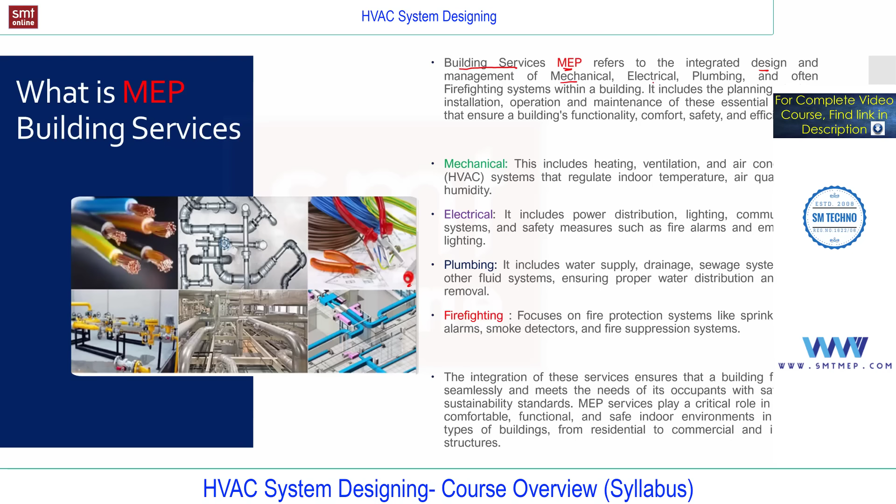So I'm going to share the screen. You can read MEP here. In short, we used to call it mechanical, electrical, and plumbing, or building services. This building services, in short MEP, refers to the integrated design and management of mechanical, electrical, plumbing, and also the firefighting system. It includes the planning, design, installation, operation, and maintenance of this essential system to ensure the building's functionality, comfort, safety, and efficiency. For example, a building without these services is of no use - a building without electricity, or just visualize a building without the plumbing system. So these services are very important for the building. In short, we used to call it MEP.

Actually it's building services, and under this you'll find four services. One is mechanical. Under mechanical, you'll find HVAC. In short, we used to call it HVAC - heating, ventilating, and air conditioning. So under mechanical, you'll find HVAC, and E is for electrical service.

Under electrical, you'll find lighting, power, and alarm, emergency lights, etc. Then P stands for plumbing. So in plumbing, you'll find water system, drainage system, fixtures, a lot of things.

So altogether, we used to call this MEP - total four services combined together. In short, in actual practice, we call it MEP or building services. So now listen, this is important. If you are learning HVAC, that means you are learning a part of MEP.

And as a mechanical engineer, it is recommended to start with HVAC, and as electrical, it is recommended to start with electrical. Later, electrical people also get involved in mechanical services, and even mechanical engineers get involved in electrical services, for what? For coordination. The reason is all these services are for the building. So the electrical engineer must coordinate with the mechanical engineers, and the mechanical service engineers must coordinate with the electrical, and all this is linked with the architect.

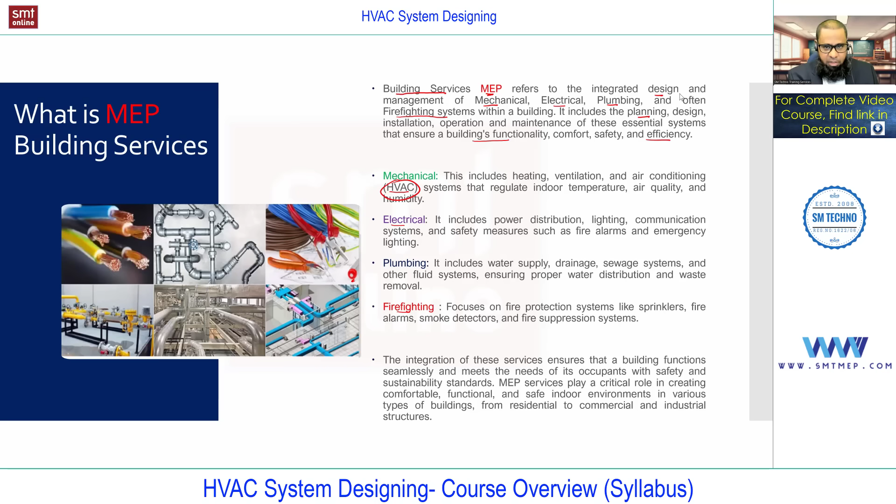So we are talking about this HVAC training. In the next slide, you'll find information related to HVAC. HVAC, in short, we call it HVAC - heating, ventilating, and air conditioning. And if you talk about HVAC, you'll find different societies like ASHRAE, ISHRAE, and you'll find carrier, you'll find SMACNA, and a number of options.

When we start the course, we'll talk about these standards also. HVAC stands for heating, ventilating, and air conditioning, and this is used to control the indoor environment conditions. At this level, I'm just giving general information. In detail, we'll discuss in chapter 1.

We'll start with the definition of air conditioning, so at this level I'm just giving a quick idea. HVAC stands for heating, ventilating, and air conditioning. It refers to the technology and systems used to control the indoor air environment or condition, including temperature. So we are maintaining some parameters that include temperature, humidity, and air quality. Under air quality, you'll find velocity, distribution of air, noise level, etc.

You'll find a number of parameters that we'll discuss in chapter 1. This is just an introduction, for various buildings and structures. This HVAC is not only for residential - this HVAC system is for residential, commercial, and no doubt industrial. And not only for human comfort, this is also for process control. So you'll find n number of applications for this air conditioning.

Okay, so this is just a quick idea. So as I said at the beginning, in this session, you're going to learn what you're going to learn in this training program. So I'll give you a brief idea about the syllabus.

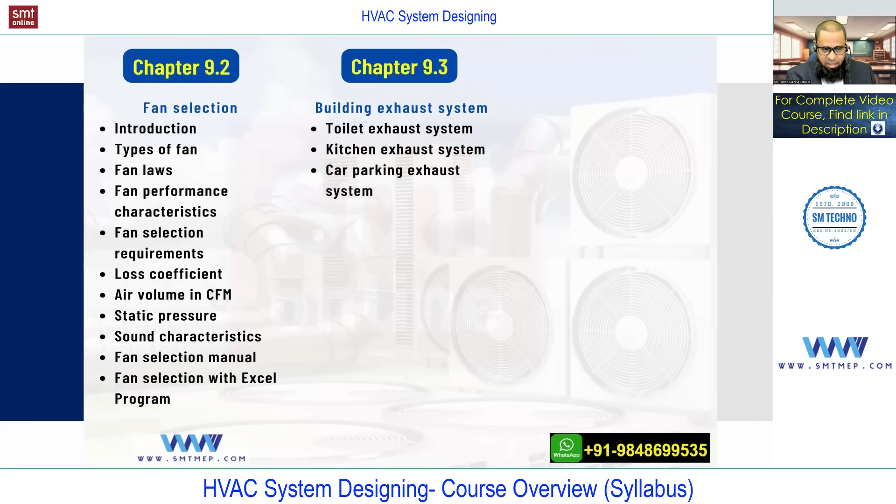Then we'll also discuss the exhaust system. This I'm also considering as air side because the exhaust — toilet exhaust, kitchen exhaust, or car parking exhaust system — all I'm considering in air side because it's an air side system. So all you'll get in part 4.

Now, part 5 of module 1, I'm considering water side, water system. Water system means I'm talking about the chill water side. It can be for air cooled chiller or it can be for water cooled chiller. So different types of pipe, different material, then the arrangement like direct return system or reverse return system.

Then no doubt this pipe designing. Again in pipe designing, first we'll deal with the manual chart from ASHRAE or from Carrier. The end result is going to be same.

Then the same example, I'll proceed with the pipe sizer. Most commonly in actual practice, you'll find McQuay pipe sizer. Then we have different methods for pipe sizing like velocity method or ASHRAE method, velocity plus friction, etc.

So in chapter 11 of part 5, you will find fittings and accessories. Different fitting, different accessories, which is very important for interview point of view. We used to call it, say, valve package, or we can also call it hookups.

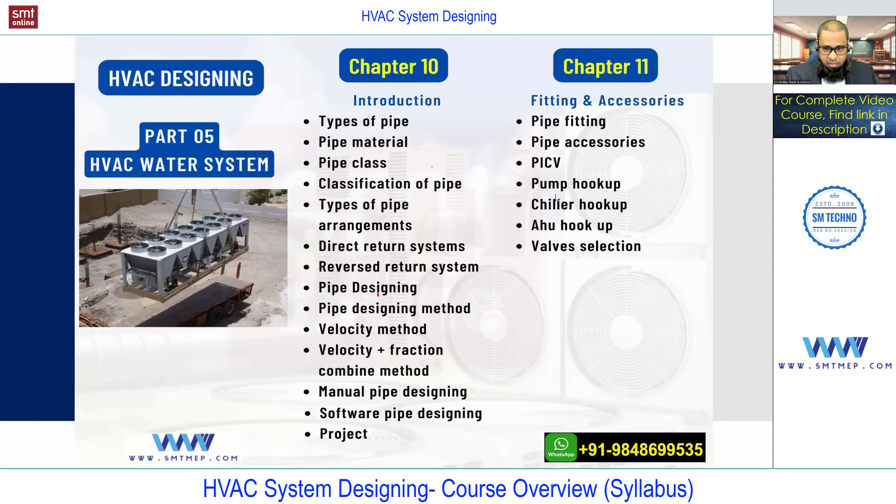Again, this chapter 12 is important for pump selection. So this pump selection also I'm considering in part 5. Different types of pump, different pump laws, then how to design or select this pump, how to find out the head calculation with an example, with a sample project.

Again in pump selection, first we'll deal with the manual calculation, then the same using Excel program, because in actual practice to save time we are using Excel program. So once you know the concept manually, using Excel is going to be simple.

For primary pump, for secondary pump, or the different systems like primary only system or primary plus secondary, or you may find primary plus secondary plus tertiary. So you'll find the different systems related to pump — all about this pump selection you'll find in part 5 under chapter 12.

And chapter 12.1, which is also a part of part 5, you'll find the cooling tower selection, makeup water tank, expansion tank, air separator, etc.

So this cooling tower is for water cooled chiller. Makeup tank, again for water cooled chiller, even for air cooled side also but limited capacity. Then expansion tank sizing, again for both chillers, air separator, etc. So this I'm considering as an advanced topic, which you'll also find in part 5 of module 1.

So these are the total 5 parts of module 1, which comes under designing. So module 1 I'm considering as HVAC designing.

Okay, so the major part of this training is this designing side. Designing is divided into 5 parts. Part 1 is basic, part 2 is manual load calculation, part 3 is software load calculation, part 4 is HVAC air side, and part 5 is HVAC water side. So I think you're getting my point.

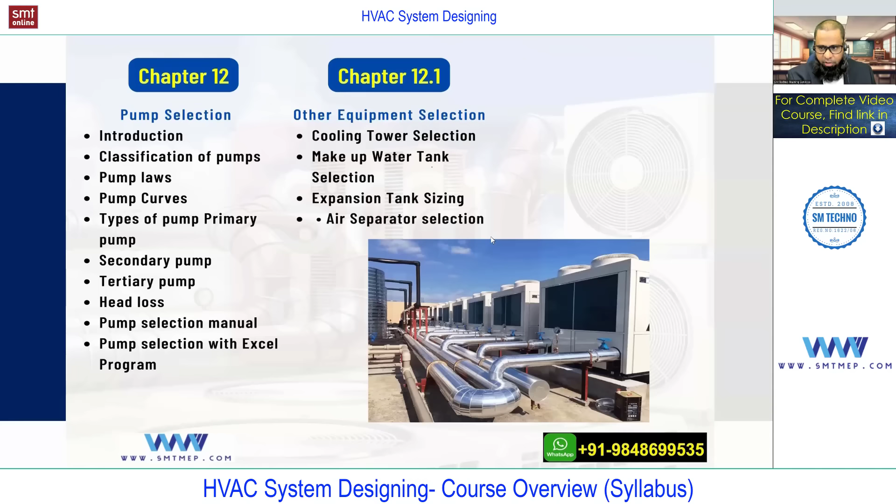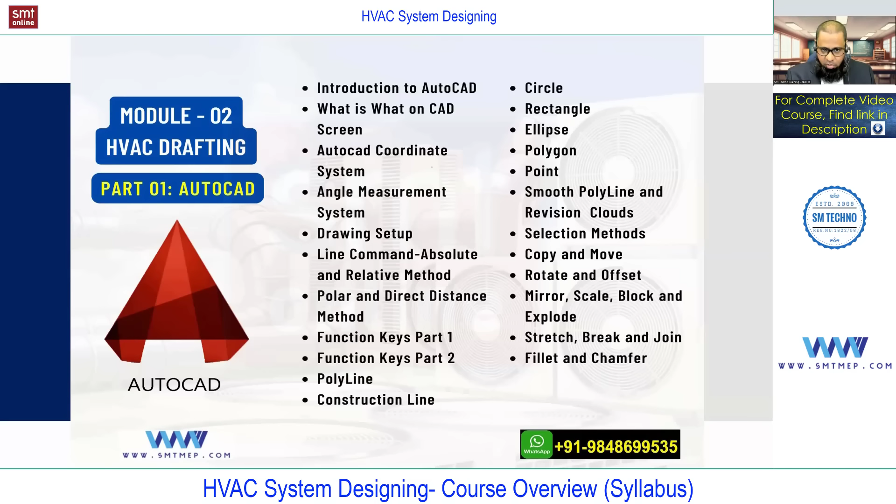So this is about module 1, HVAC designing. Next, if you talk about module 2, I'm considering part 1 and 2 in module 2. Part 1 is AutoCAD, how to draw, and part 2 is HVAC drafting, what to draw. So you can read all these topics. I'll share this presentation after the session. You can spend some time and read all the topics so that you'll get the idea what topics you're going to get in this.

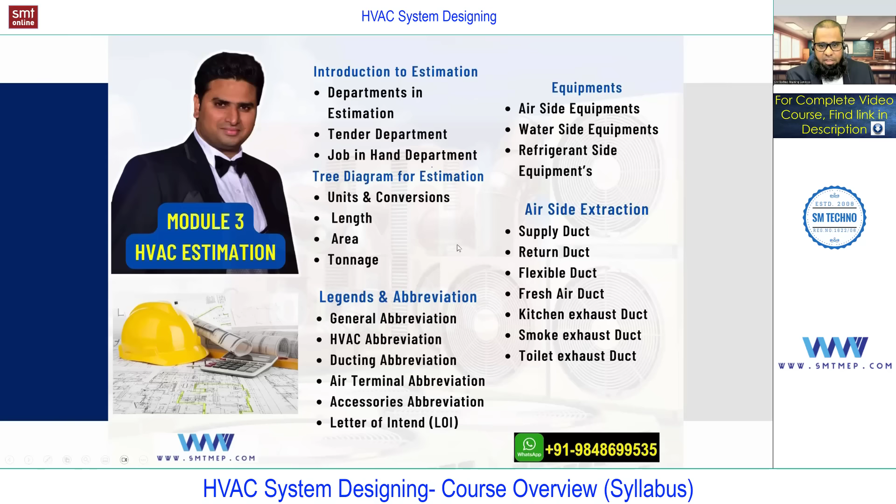Next, module 3, I'm considering HVAC estimation by Mr. Habib. He works as an HVAC estimation engineer in Kuwait, and he will offer a tower project, and that too in video. The estimation also covers a complete project, a tower project, total 24 floors. In this you'll also find notes, data, including the project file in DWF format with design review software. So you can go through all these topics. After the session, I'll share this presentation. In this estimation you'll also find air side, water side extraction, and different system equipment, etc.

Next, module 4, I'm considering HVAC installation. In HVAC installation, you'll find installation for chillers, installation for AHU, FCU, duct installation, pipe installation, pipe insulation, duct insulation, etc. Apart from this, you'll find some additional notes for self-study, like tab work, maintenance, filters, safety, and sales. So these are the complimentary self-study notes we'll provide with this training program.

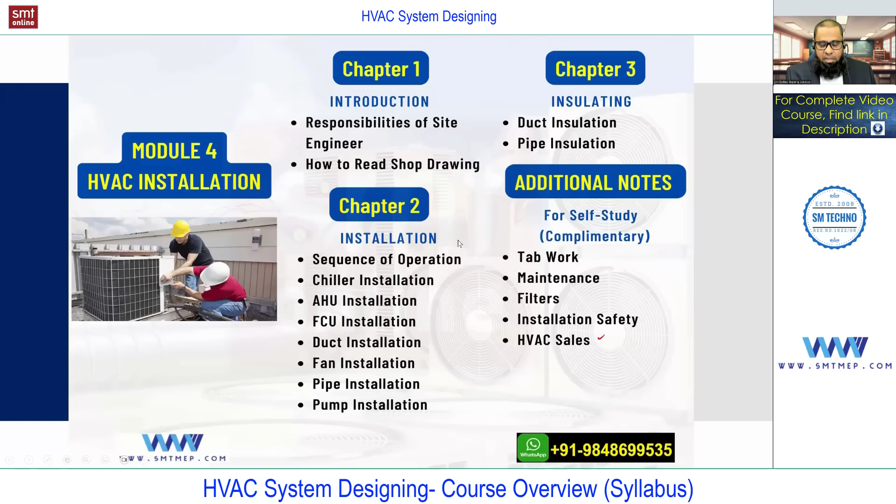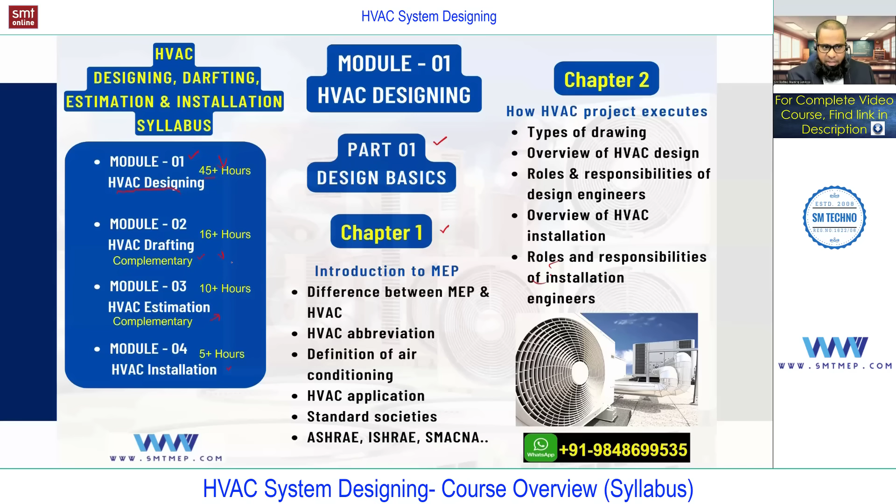So you're going to get the complete package, that includes 4 modules. Module 1 is the designing module, so it's a complete one package for this HVAC course. Module 1 is designing, which consists of 45 plus hours live training. Module 2 is HVAC drafting with AutoCAD, 16 hours plus complimentary. Module 3 is HVAC estimation, 10 plus hours, including the tower project. And module 4 is HVAC installation.

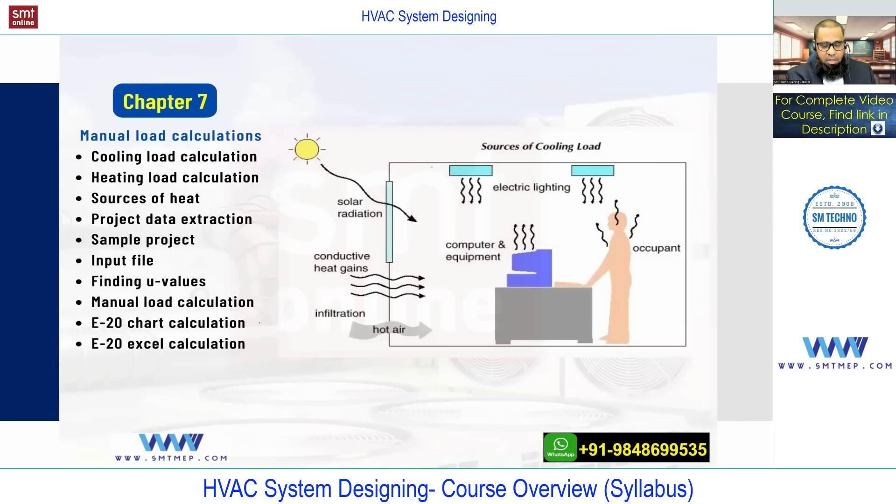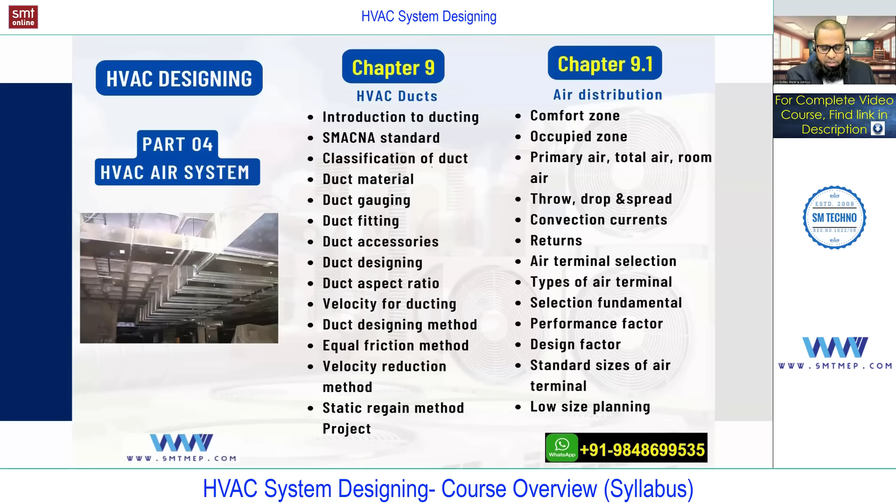So it's a complete package that includes designing, drafting with AutoCAD, estimation, and installation. If you're working on the design side, installation knowledge will help. Or if you're working on the execution side, design knowledge will help you take decisions. And if you're working in the estimation division, the estimation course is enough to start work as an estimation engineer. No doubt drafting will help you for draftsmen, but as an engineer, drafting will help you for extracting data at the time of load calculation and for minor changes as per requirement. Even as an engineer you should know AutoCAD, but not like a draftsman, at least you should know the basics. I cover AutoCAD in detail, the 2D side, as well as the drafting part, you'll find for air side as well as water side.

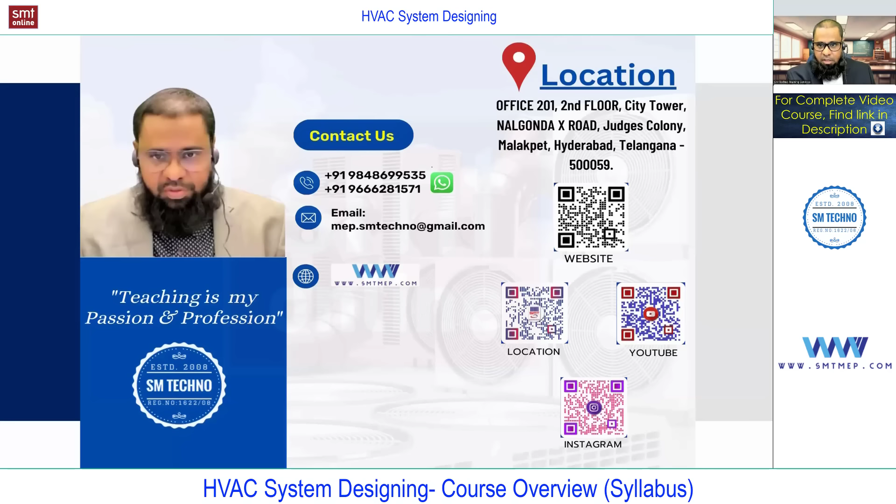I'll share this presentation, you can go through once. We are offering this training from 2008, and we are based in Hyderabad, India. We are offering this live online from 2009 and video training from 2019.

And you see, people have confusion between MEP and Revit MEP also. Revit MEP is an advanced software which works on the BIM concept from Autodesk to design building services. So if you know MEP, then you can think about Revit MEP, because Revit MEP is the next level. As a mechanical person, if you know HVAC design, you can think to deal with Revit. As electrical, if you know electrical design, then you can think to deal with Revit. But directly learning Revit is not at all recommended and will not be offered either. So if someone is asking for Revit, first we'll confirm whether they know the services or not. Revit MEP is software from Autodesk that works on the BIM concept to design building services. So if you know building services design, then using the software called Revit, you're able to design the services. So at the time of learning Revit, you can focus on the software with the knowledge of these services.

We are offering separate courses. Course 1 is HVAC, course 2 is electrical, course 3 is plumbing, and course 4 is firefighting, then Revit MEP and Revit architecture. Revit architecture is for civil point of view. For mechanical and electrical, you can find these courses. Electrical is separate and firefighting is a different course. So what I'm talking about is HVAC, and this training program is for HVAC. Thank you, okay, fine.